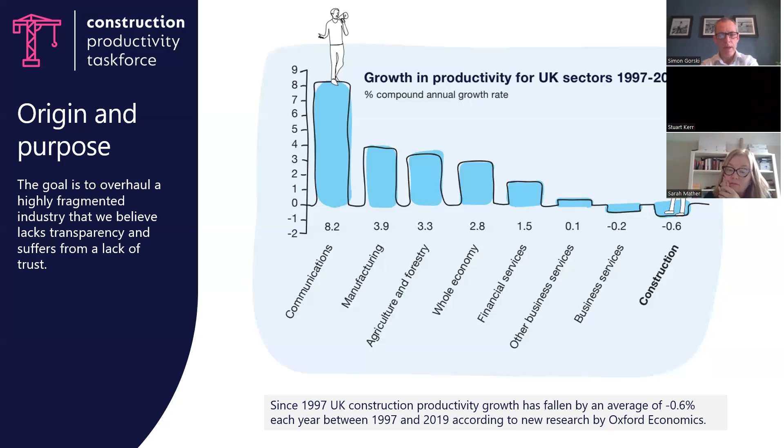Of course, there's definitely that to our industry, but I know that most of the people that have dialed into this call and most of the members of the organisation will be thinking about how we do it smarter, better, and that's a little bit about what I'm going to talk about today.

Be the Business as the organisation formed a few years ago, and Anthony Impey is the chief exec of that organisation now, and they really look to industry to pull together some of the industry's most significant organisations into looking at how we drive productivity improvement across the construction industry, the whole cycle of the construction industry.

I hope you can see the sort of full screen of names there, for those that are sort of dialing in who aren't part of the green room, if you like. But what hopefully you can see there are organisations like British Land, GPE, Great Portland Estates, and Landsec.

And it was really important that when we established this group that it was client-led, because you can imagine, for those of you that work in my world of the tier one contractors and the supply chain, if we came up with anything without the clients on board, it would be seen as self-serving. Well, of course, you would say that, wouldn't you?

So we've established what I think is a really powerful and representative collection of organisations there that are clients, tier one contractors, supply chain, and both design, project management, and cost consultants. And that sets us up for real success, I think, in what we try to do.

What we're not doing is we're not competing with the established groups, Build UK, the Construction Leadership Council, the British Council of Offices, and that's not our purpose here. We're not trying to form another breakaway group. I think many people on this call will recognise that we're quite a fractured, sometimes fractious, but quite a fractured industry that does unique things on a regular basis.

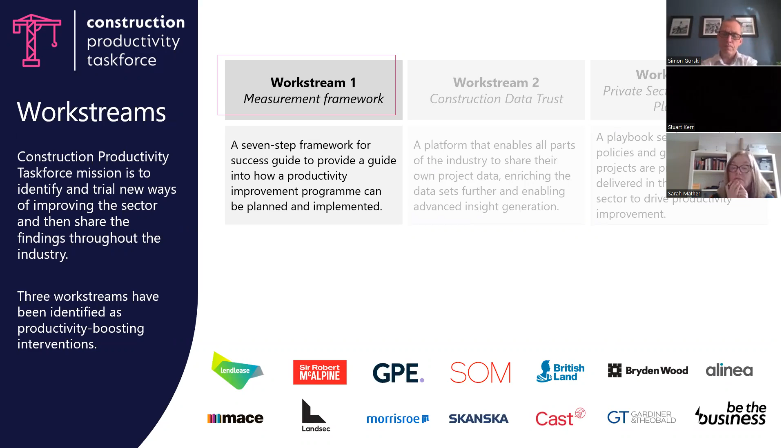The reason the clients are very interested in this is that they want to know that if you do get this data, both the measurement framework and the data trust information, that they will get better, they'll get it quicker, and they'll get it for less.

What the clients are very clear about here, and I can tell you I'm very clear about this with our supply chain and others, is that profit is not a dirty word, but we need a sustainable industry. I use that in every sense of the word sustainable, but we need a viable industry, an industry that's able to make fair profits, to be viable, to have positive cash flow, and we need a supply chain able to support us.

This moves me on to the private sector playbook and what I want to talk about today and why I think it's so important. I and other organisations had a small part to play in the public sector's, the government's construction playbook, which came out maybe 18 months ago now, and version 2's already been issued. To be fair to the government, I can't always say this, but it was a very collaborative process.

But of course, the government's construction playbook is necessarily different in some ways to the private sector playbook, to trust and productivity, because there's government policy you have to abide by. There are specific rules governing payment, competition, governance generally, and how that works, and the rules around procurement that don't necessarily apply in the private sector, but there are many things that do read across and play across to what the rest of the industry did.

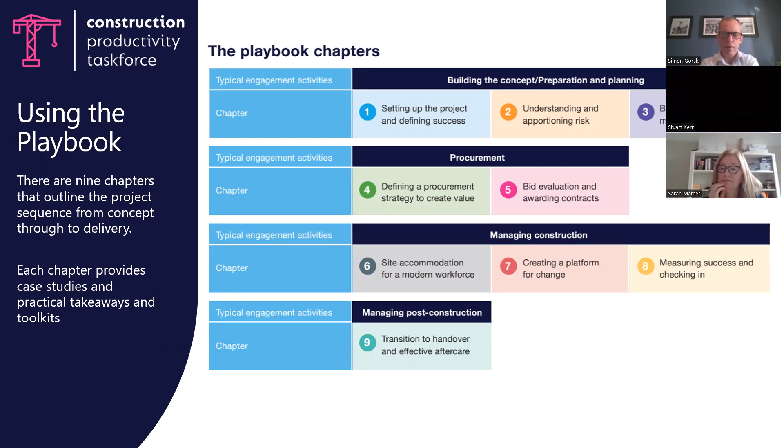It's about innovation, and it's about, when we finish the job, finishing well and handing over in some style, so the building is ready for occupation, and that there aren't going to be things going wrong, and we don't have a reputation. We don't want an industry to perpetuate a reputation of having to go back and fix yesterday's problems.

Mental well-being, ensuring that the people that we look after... I don't need to tell you all the stats about suicide within the construction industry, but let's just say it's horrific. I don't need to say that society now and the pressures on us all, the cost of living crisis, the pressure on people that work in our industry and many others is hugely challenging. That is non-negotiable. If we're creating conditions that make people's lives less safe, the public, our workforce, that their well-being is negatively impacted, then we're not doing a good enough job.

That's non-negotiable. Sustainability, of course, a commitment to taking carbon out of the environment, and our commitment in that space is also non-negotiable. We've all got organisationally our own challenges. Lendlease has got very ambitious targets. Delighted that we're already net zero in our construction business for scope 1 and scope 2.

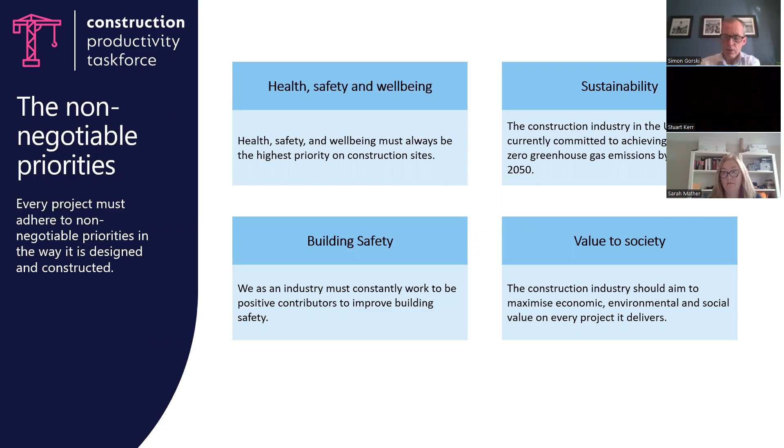Home straight, I promise, because I am gabbling now, but I love this subject so much. We do have these 10 drivers for success. When you do get the book, please do go through this and understand what we're talking about, this effective partnerships. Again, as contractors, for me, it is about understanding what the pipeline is, understanding what the future holds for clients, and then we can make investment decisions.

I've talked about, for example, the Ministry of Justice, the Ministry of Defence in the public sector, but the same with British Land, with GPE, with Landsec and others. Let us understand what your pipeline is, how you're going to move forward on it, and then we can invest and create long-term partnerships with you and with our supply chain.

I'll let them read, you can read the rest yourselves, but you can imagine there was interesting and robust debate about things like allocating risk fairly and getting paid fairly. I'm delighted to say the clients were very supportive of this. We launched it in November, as I said. It was fantastic, we had 150 or 160 people there. It landed really well. The next phase of our launch is to do things like this.

I can see Dirk's now coming to my screen because he's got some questions he wants to facilitate. So if you want more, there's a couple of links in the presentation, you can get to those. And Dirk, of course, I will send you any links to the information you want. I commend it to the audience, as they say in all the best budget speeches. Dirk, I'll hand back to you to maybe facilitate the questions.

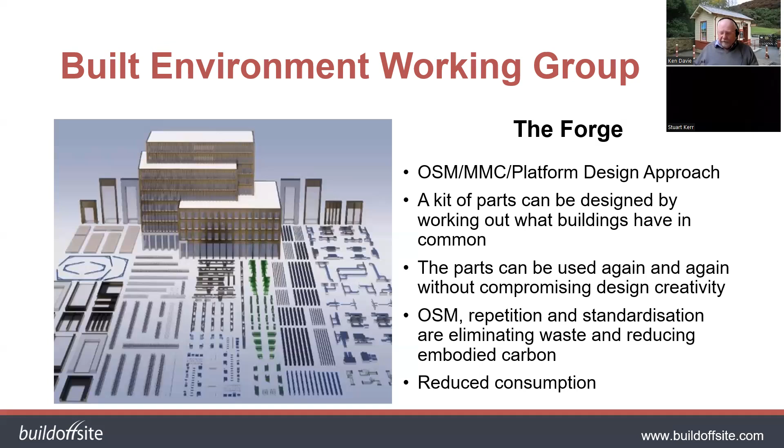Just very, very briefly, not wishing to steal Andrew's thunder on Millsite, really fascinating project. I think one of the key things here is the fact that 4 tier 1s have actually pooled their staff and experience to actually get this project on site in less than 16 months. Kier, I understand, is running a project in terms of tagging and tracking precast components, looking to improve productivity, quality, and potentially to improve valuations to reduce the amount of effort required.

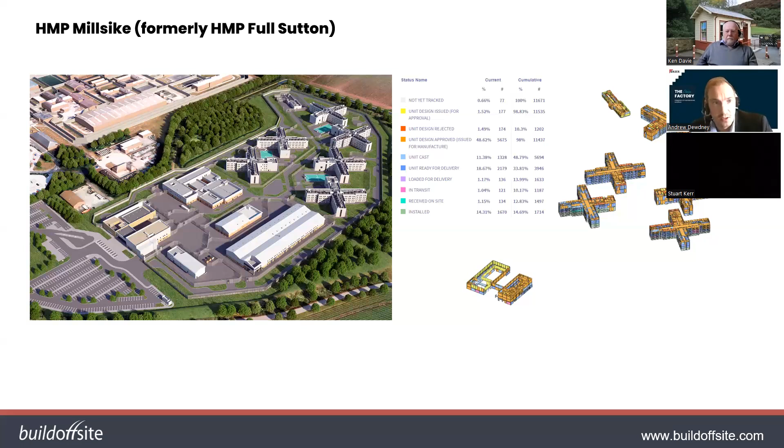I'm going to go back a slide to this one. So in the last year, we've been working really hard to further integrate our supply chain. One of the real successes we've had is getting onto the Crown Commercial Service Offsite framework. This is a new framework that's taken over from an old modular buildings framework. It has a £10 billion throughput for spend in the next 4 years, split between key sectors, which are all our key departments where we work for the government. We do about 80% of our work for the government, so those are the key sectors we work in.

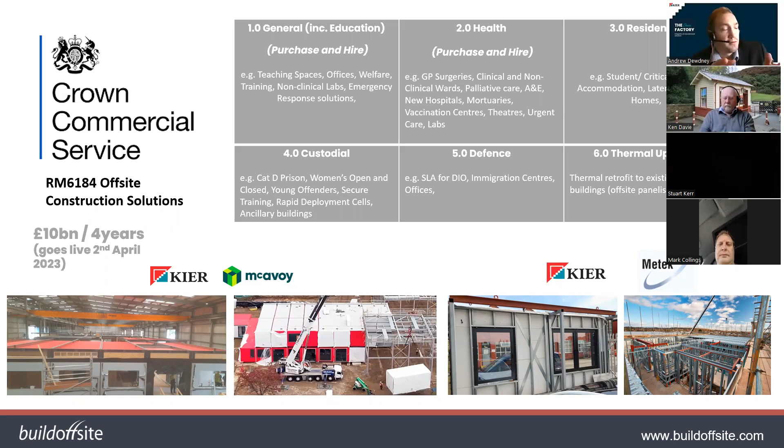Interesting to see the thermal retrofit, which is for an offsite panelised retrofit, so you can see where the government's thinking about that. As part of integrating for this framework, we've set up 2 JVs. Kier have set up a JV with McAvoy, Kier McAvoy, for our 3D lots, so each of those key sectors is a 3D lot. And the bottom right, our 2D panelised JV, Kier Metek, so each of those government departments or sector departments also has a 2D lot. So we're really happy with our further integration and how we're getting really close with some of our supply chain.

And then the last slide I have is just a bit of an update on our private sector. We've won a couple of really interesting jobs in London with commercial private sector clients, both heavily offsite based. The market for offices is still quite buoyant, surprisingly, after COVID.

Absolutely, the cut and carve retrofit is up there as well, which is where we're looking to in the future. But certainly, we're really proud of some of the commercial offices we're currently delivering on site at the minute.

And that is pretty much the update of our key offsite areas throughout the last 12 months. We've got offsite projects across the board, across all the sectors. But I wanted to keep it quite short and sharp and give you an update.

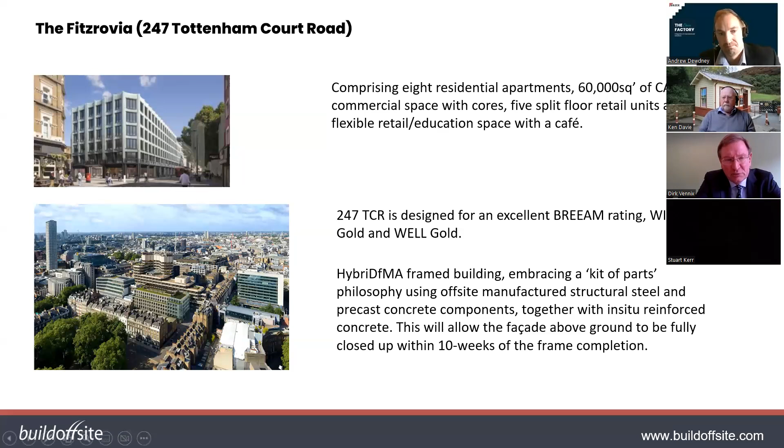Thanks very much, Andrew. That's a really good overview. I'm surprised you didn't mention winning the Infrastructure Award of the Year last year, but a really good job showing what members are doing in terms of trailblazing on the offsite front. So thank you for that.

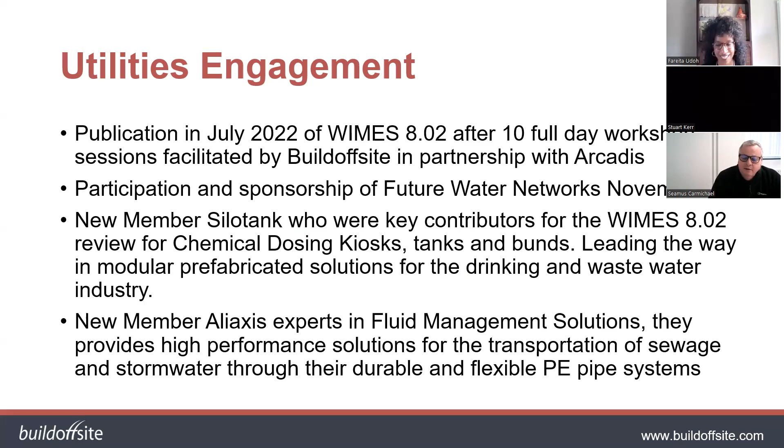Good morning, Fareita. Good morning, fellow members. Thank you for having me today. I'm Seamus Carmichael, Managing Director of Silotank, and we're based in Belfast, Northern Ireland. For those of you who don't know our company, we've been around for about 31 years, leading manufacturer in chemical, liquid and drinking water storage tanks. We also make process vessels, salt saturators, pressure vessels, scrubbing systems and odor abatement systems out of a range of thermoplastics and fiberglass materials.

As Fareita said, we were involved with Roger Marlowe on the rewriting of the WIMES standard and made our contributions there to the rewrite and republication of that standard, which came out this year, hopefully for the better. However, today I want to talk to you about conical settlement tanks.

For the last 10-15 years, we've been building these in fiberglass, and through our experience working with various contractors, we realized that the on-site part of the construction of these sectional units was causing considerable time and safety issues. What I mean by that is that where we have a 6-meter diameter unit going to a wastewater treatment works, this would have been supplied in sections which would have had to be bolted together and laminated and passed down into the hole, and then the pipework and weirs would have had to be built inside it.

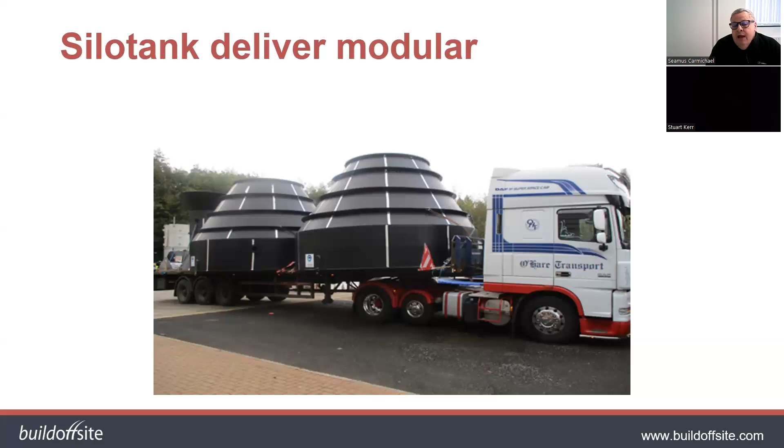So the ability of what we've produced now is that our HDP conical unit, with a wastewater treatment works, the hydraulics of the site are very important. So shell heights may vary, and through our approach and our manufacturing, we can customize the diameter of the unit to the specific site, which does 2 things. Number one, it reduces the amount of material, and the amount of carbon, but it also allows for a more targeted treatment process, which benefits the end client.

The beauty of using the high-density polyethylene material over the traditional fiberglass is that it has better chemical resistance properties. And as we all know now, in the current marketplace, people use a lot of chemicals in their houses for cleaning, which find their way straight into the wastewater treatment plant. The internal finish of the conical settlement tank in HDP is like a glass smooth finish, which aids the cleaning of the unit and the operation of the unit, which we found received feedback from various operators that's a benefit.

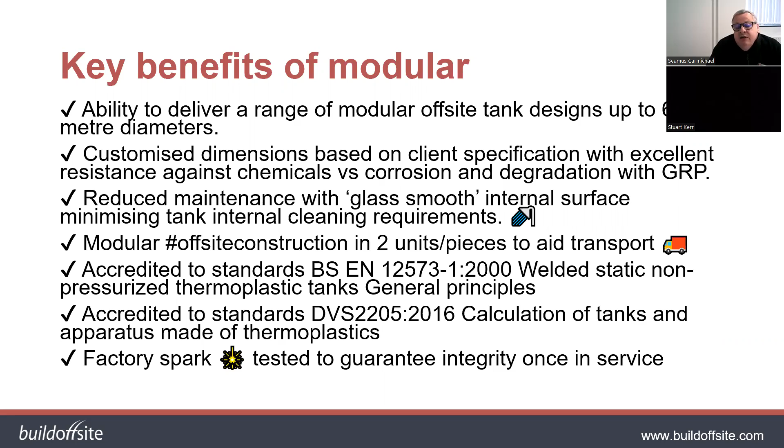So all our units have all the pipework, the weirs, the diffuser drums all built into the unit before it leaves, and they're transported to site upside down and then topped and tailed. And if they're over 5 meters, the bottom cone section is joined at site, and then it's dropped down into the hole, filled with water and backfilled with concrete.

So the traditional way, and what we had done up until 4 years ago, was to make these in fiberglass, and it brought a lot of health and safety issues. Our original ethos and objective behind developing a factory constructed unit was that we wanted to reduce the on-site installation time, but we also wanted to reduce the fact that operators would not have to climb down into these units. Some of them are 7 meters below the ground in order to fit pipework and fit weirs.

So the HDP has cured that, because they're all welded in at the factory and leave the factory constructed. The other problem we were having as well is that weather was dictating how quickly we could install a GRP unit, because after the sections were bolted together, the joints inside had to be laminated, and you couldn't do that in cold or wet weather.

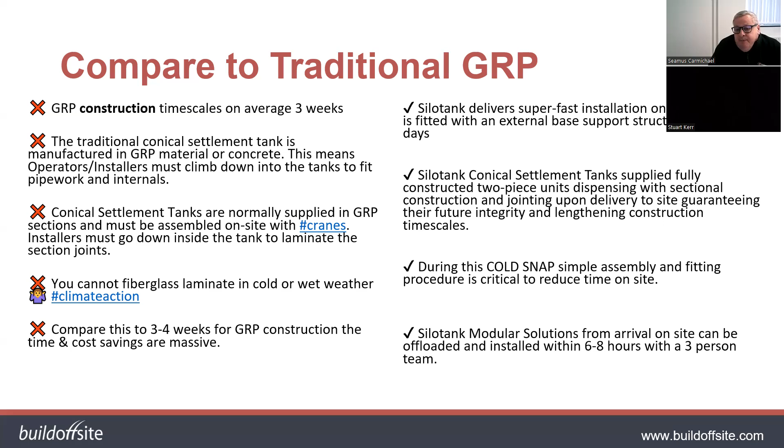I have some shots here for you just to show you the install. You can see actually the depth at which the excavation goes down, and the amount of reinforcing of the surrounding soil that's required. So on the larger units, which have got 2-piece, we send the smaller cone section forward to the site.

Which allows the client to install this and backfill it. So when the larger 6 meter or 5 meter or 5.5 meter diameter section arrives on site, it can be topped and tailed very quickly and joined to the already installed section.

On units that we sent to United Utilities for bulkly, VolkerStevin, from receipt of a 6 meter unit, after having got the small cone section the week before, they had the unit installed in 2 days. And we're very pleased with the time savings that they'd achieved.

You can see the amount of reinforcement that goes around the unit, which is usually required due to the fact of high water tables in a lot of areas, and then a couple of shots of the finished concrete surround and the bridge that goes over the unit.

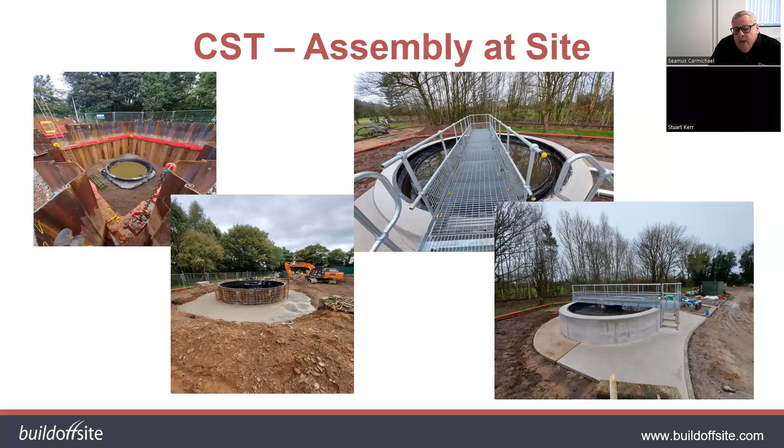As Simon had described earlier, carbon is going to become probably one of the major purchasing decisions going forward for products, and we've seen this coming more and more to the forefront for the last year, and have appointed an internal carbon manager, where we're looking at all our products from the point at which the product, the granule, is actually made for the HDPE, right through to the delivery to site.

And what our analysis, with the help of Invest Northern Ireland and a carbon specialist, we've now developed a carbon calculator model. And the interesting thing that has come out of this is that when you compare a HDPE unit to a fiberglass conical settlement unit at a 4 meter diameter, there's a 28% saving in carbon, which is massive.

The good thing about HDPE is that at the end of its life, it can be taken out, cut up, and turned into regrind. You usually see this product present itself on park benches and various products like that, decking.

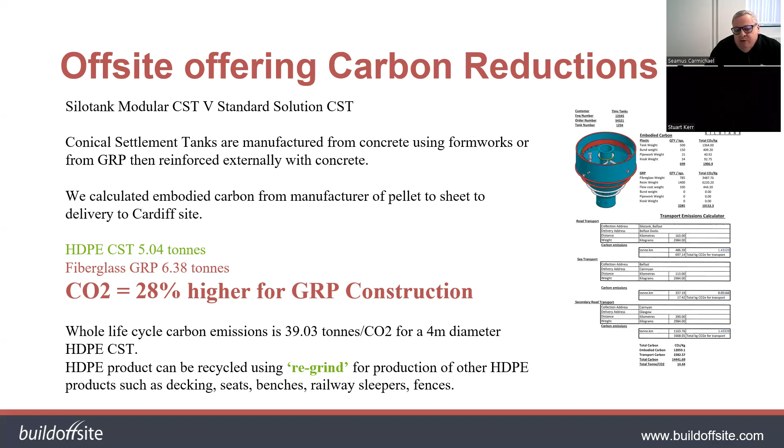Carbon is going to be the driving force going forward, and we can see that becoming stronger every year, being asked for by more water utilities. What is the embodied carbon in your product is the main question we are being asked month in, month out now.

So we're glad to be able to present that now. We joined the Buildoffsite initiative. Farida is very convincing and highlighted the merits of it, which we found to be very true, and we've only been a member now about 6 months. Farida's been helping us with spreading the word of our offsite construction, factory constructed HDPE conical settlement tanks through various water utilities. That's a slow process, but we're unstinting in our approach.

Welsh Water have been very engaging with us, and we've been feeding lots of information into them and waiting for further feedback to come back from them. Farida's been developing a range of case studies for the various sites and projects that we've been doing over the last 3 to 4 years, just to show the marketplace the added benefits that contractors are receiving from using the HDPE conical settlement tank.

Any questions? We have some questions through the chat. There's a question from Ganga Prakya at Sir Robert McAlpine: what is the design life of the HDPE CST? 50 years.

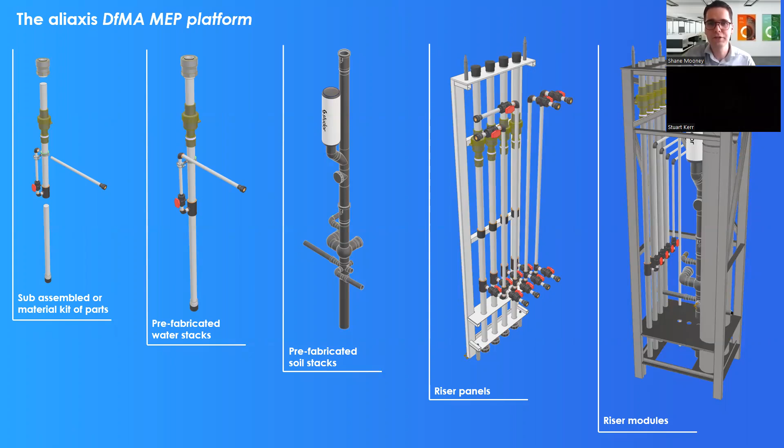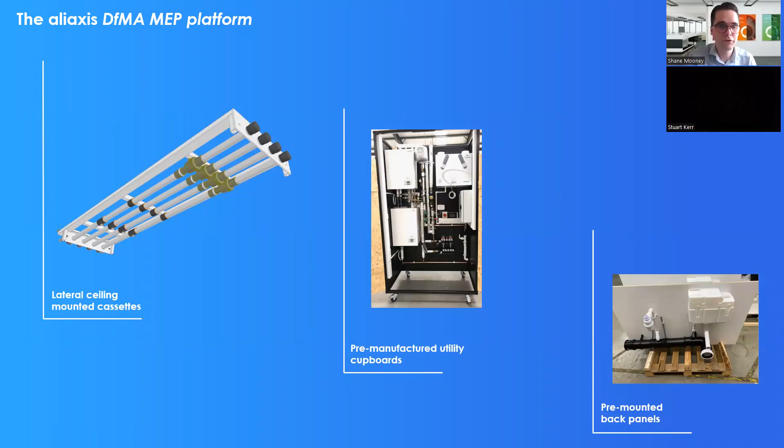This is more than just about riser modules. It's about lateral ceiling mounted cassettes, manufactured utility cupboards, and other second fix apartment type solutions that we bring in through both internal innovation and through works with our partners.

Again, some of this may be very obvious to people that have worked in the industry a long time, but I'll go through it because there is a point where it becomes a little bit different.

Naturally, delivering this sort of solution relies on collaborative design at a really early stage of a construction project, and we see the most ideal stage being between stage 2 and 3.

Services are pre-installed by the experts we have in-house in a dedicated production environment, and all of the benefits that sort of controlled environment brings.

Each service is fully tested before it leaves our factory to robust quality procedures - that could be the ventilation pipe, the soil and waste, and pressurized connections too.

The complete modules are delivered to site in line with the demands of the project schedule. That's really no different to how other providers are delivering these today.

However, we are focused on the installation, as I mentioned earlier, and the proposition is that we will lift these modules up, lower them, they will click into place, and they will connect without the need for any manual intervention at all when it comes to the individual service connections.

The innovation you can see here, hopefully you can see it well, is a precision cut plate at the top of each module with an integrated pin and bush system, which aligns frame to frame rather than plate to plate to ensure precision alignment.

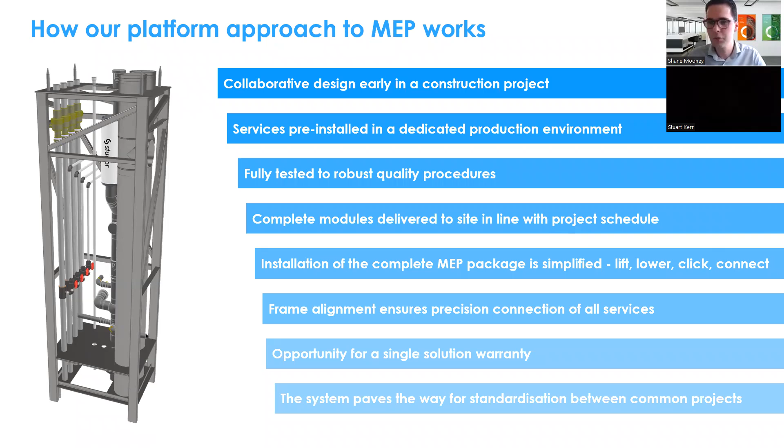And the system will naturally pave the way for standardization between common projects, hence the platform approach.

How much time have I got left? I'm going to race through a bit of this so I don't overstep the mark too much.

We've spoken a bit about this already, but speed of install, installing these things efficiently, has really been a focus for us. What we expect to do is set the foundation plate before any risers are delivered to site, and then when they're delivered, they simply land on top of each other with no secondary fixings needed.

There are obvious health and safety advantages, like people not working over each other on site in quite a restricted space. But we have also built in a fall protection grid, so no GRP needs to be retrofitted when pipes are installed, and there is no need to make those manual connections, which obviously creates risk on site.

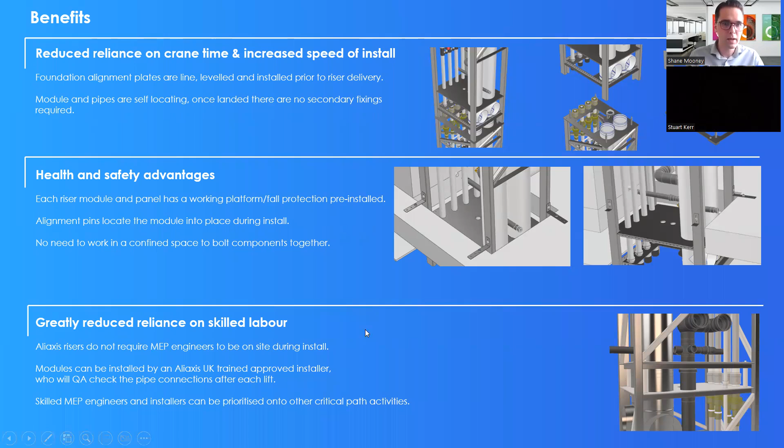Doing it in the way that we're proposing, we believe greatly reduces the reliance on skilled labour, and we believe that the labour that would usually be deployed for that can be redeployed elsewhere onto other critical path activities.

Delivering in this way naturally will pave the way for better facility management. So we think that the whole principle of what we're doing is to make sure that what is designed early on in a project is delivered on site in reality.

This is going to be helpful to guide people to exactly what they need to find. The module that we've designed that you saw on our screen, the big riser module, can stack 16 stories without the need for resetting.

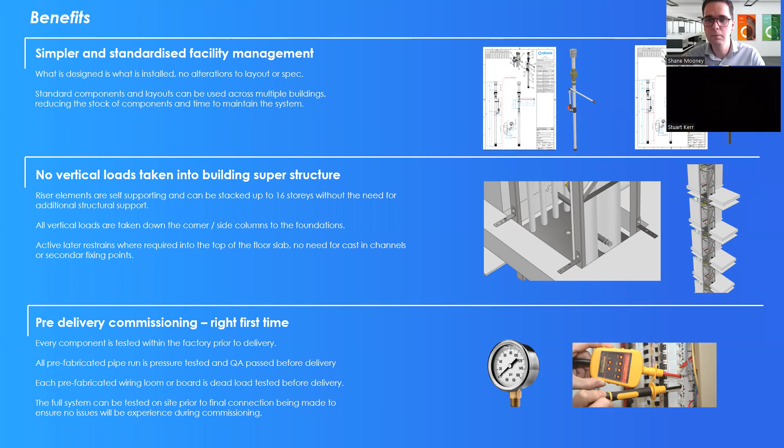There is a lateral support required at every 8 stories. As mentioned earlier, all components will be tested before delivery to site, and we anticipate that we will need to cap off the complete riser before pressure testing the entire building before it goes through to full commissioning.

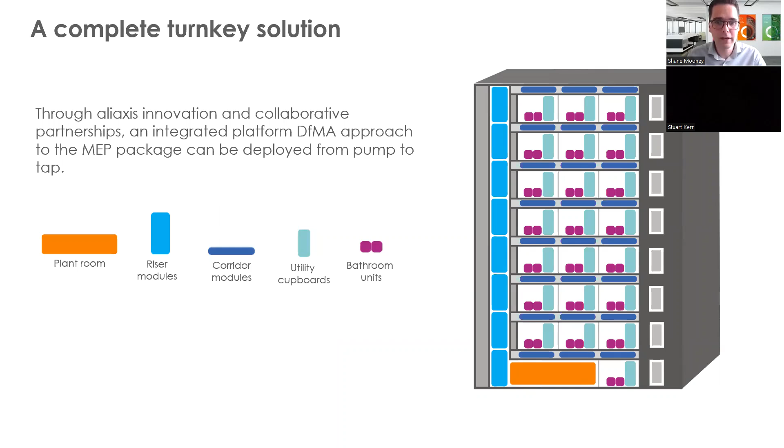Again, just a quick reminder, this is not just about risers. We envision this being a full turnkey solution through both our own innovation and our partners. I'm being told to wrap up, so I'll do so very quickly.

The way that we deliver quality helps to deliver means 3 key things for the future of building: operational performance, things being built better and as they're expected to be, simplified facility management for the reasons mentioned earlier, and the paving of the way for a complete solution warranty.

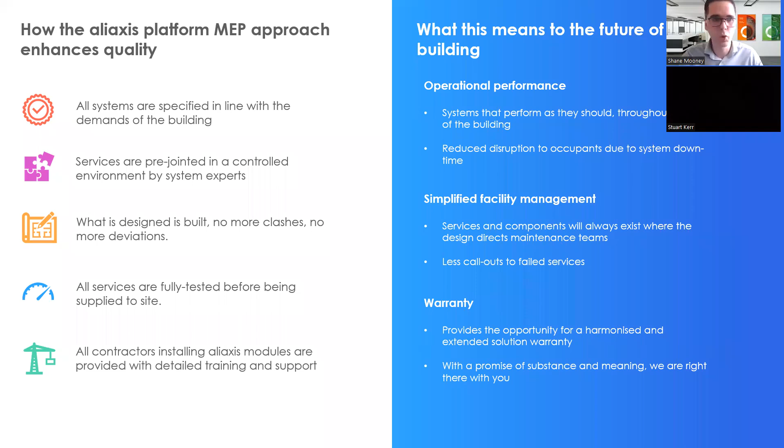Ganga's asking about the lateral connections of the horizontal modules. Is that still the same principle of plate and pin? Is the same principle required for the lateral connections?

I don't know if you can see the chat, let me check the question. So the question is, was it about tolerance of lateral connections connecting into the riser module? I can't, bear with me, I'm ever so sorry. What about lateral connections of horizontal modules? Is it still on the same principle of plate and pin?

Yes, that's correct. Sorry, the picture wasn't particularly good on the slides that we shared, but yes, we envisage it working on that same principle. It will also use the same connection innovation we've developed for the riser, because it caters for that inherent lack of precision when it comes to how buildings are built today.

Could you also answer Nigel's question about the strength of the pipes? So I'm just trying to find it. Nigel asks, does the strength of the pipes connections within the modules get taken into account when calculating the strength of the carrier frame to reduce material content?

So a little bit about National Grid. It's interesting because National Grid is a name that everybody knows, but the bit of National Grid that I'm from is a recent acquisition for National Grid Group. So I think when people talk about the grid, they talk about the transmission bit - the bit with the orange boxes on the left-hand side, that's the high voltage backbone network across the whole of the UK that looks after electricity transmission, connects power stations to everybody. The bit that I'm from is the green bit.

So in our world, we're a company that were called Western Power Distribution before we were called National Grid. And actually, if you're as old as me and you can remember nationalisation, we were South Western, South Wales, Midlands and East Midlands electricity boards. But we basically serve 8 million customers across that chunk of the UK. It's about a third of the customers in the UK. And it's likely that if you've got an electricity supply, it will come from us. There are independent operators working in patches, but generally, if you've got a supply, it's ours.

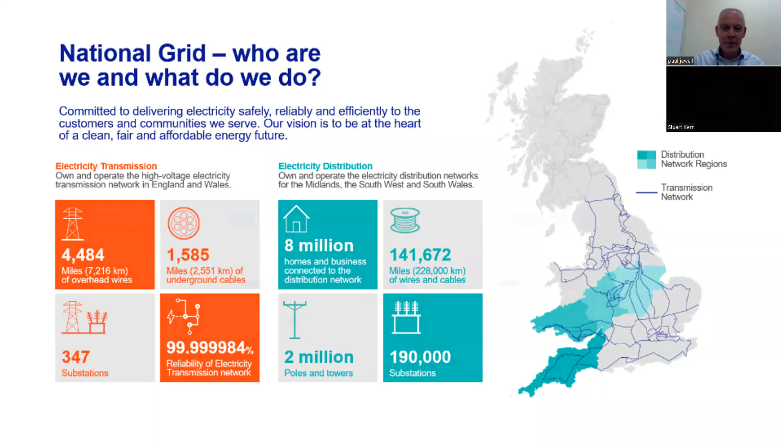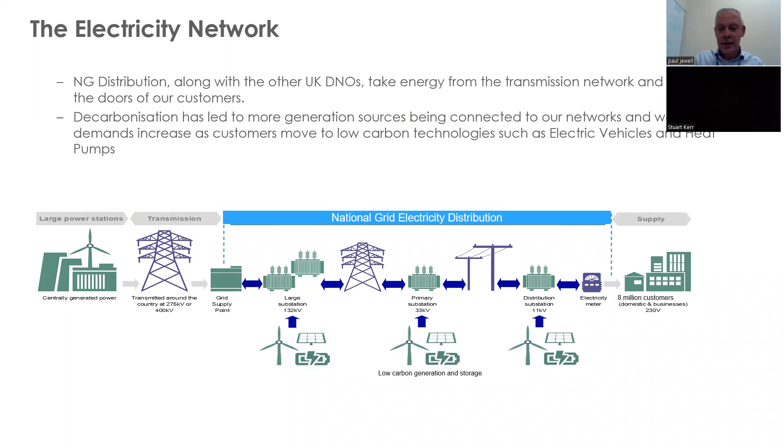And with the changes of decarbonisation and net zero, what we're finding is there's a different mix of customers on our network - a lot more customers that will generate electricity straight into our network, which isn't the old traditional role where all of energy was generated at large power stations over on the left of that slide and pushed across the right hand side. So we're changing the way that we do things, all in the line of trying to get the government and the country to net zero. And I've mentioned net zero a couple of times.

Where that net zero shorthand comes from is a government announcement, I think when Theresa May was Prime Minister, to get to net zero carbon emissions by 2050. It's a big ask, a good target. The original target was, I think, an 80% reduction. That's been in our world since the early 2010s, and the carbon plan document, a government document, still exists - you can still download it if you're that way inclined.

What it basically says is that the UK is going to reduce its carbon emissions by taking energy we previously used for heating and transport and turning it to electricity. So we're already expecting more energy to be supplied by our network. I was interested in the question about asset life to the speaker a couple of speakers ago - the electricity grid essentially has a 50-year asset life as well. So if in 2023 we're not already building assets ready for a fully decarbonised future, then we're missing our opportunity.

So thinking about where things are going, let me share some government numbers. Fast forward to 2030, you will not be able to buy a petrol or diesel car - you'll buy a hybrid or electric car. We know there's 1 million registrations in the UK a year. We also know that by 2030 government expects 600,000 heat pumps a year. Take that 1.5 million-ish things, put it into our network with a third of UK customers, and we get to a world where we're connecting 500,000 things a year, either to existing connections or new connections - that's 2,000 every working day.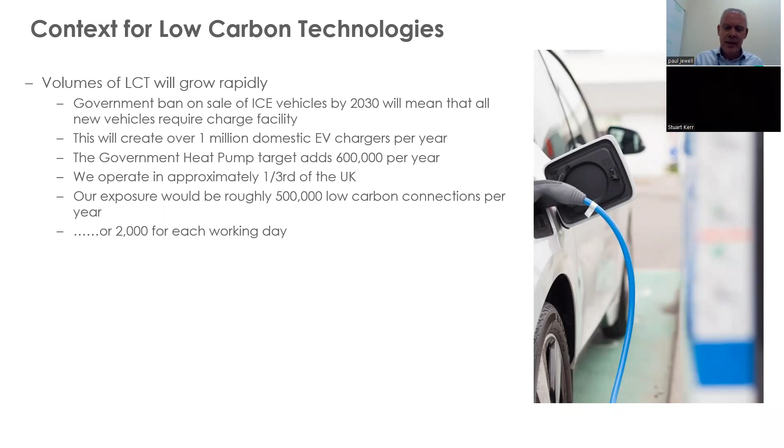In our world, when we looked at electric vehicle charging, we looked at domestic charging first. In fairness, a lot of early adopters of electric vehicles tend to be people who can afford relatively new cars, so tend to be people with driveways and garages. So a lot of that early heavy lifting was done by the existing network. But we then started looking at what happens on the motorway network - where do we go with motorways?

I was looking at what we should do and how we should change what we do, at the same time as the government set up Project Rapid - a fund, I think about £950 million, to put charging capacity on motorways and trunk roads. The first thing they did was work out how many megawatts of capacity is required at each motorway service station. It tied in with the sort of numbers I was coming up with, and in very simple terms, it means a motorway service station will have the demand of a small town to feed all those chargers.

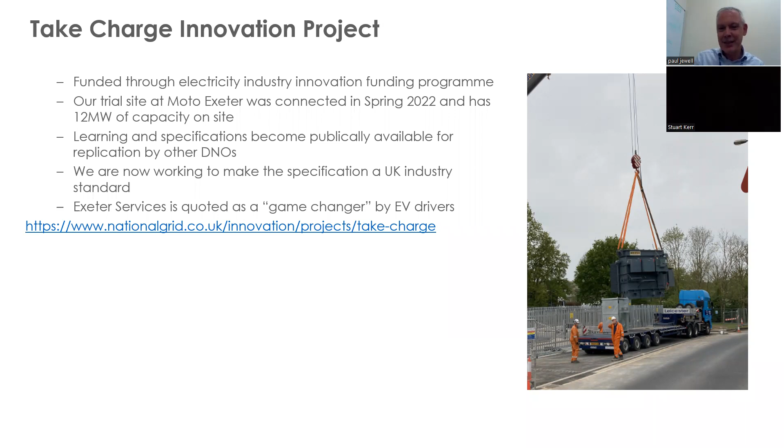Now, that's what it looks like, and you can see that it comes in two boxes. The box closer to you is the transformer. It's a total change in the way we build transformers, in that most of the ancillaries are already bolted to it, so it can come in one lift.

The box behind is the box that has all the switchgear in it, and that, again, is another single lift. I was there the day this was delivered, and it's fair to say it took longer to build the crane than it did to hoist those two bits of kit onto their plinths. That's sort of what I was looking for, something that gets most of its build done offsite and comes together in one piece.

So just to bring some themes back to the world that you guys are in, we've always built substations bit by bit. It's unusual for us to turn up with two boxes and just dump them on site, but it's perfect as a solution we've always used at 11,000 volts for the supplies that go to housing estates and the like. So what we needed to do was make it bigger, make it fit.

So two boxes. You saw the transformer on the last slide, and that's the picture of the switchgear box. Another thing we did is that those two boxes have a lot of small wiring between them. We created the umbilicals between the two as specific plug and socket arrangements, such that a lot of the pre-commissioning testing of all the kit that runs between the two of them could be done at the factory and just plugged in the same orientation when they turned up on site.

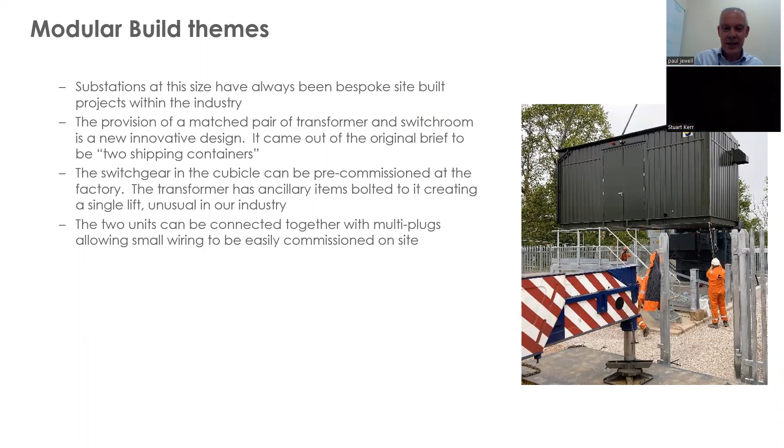And that is essentially a quick run through what we've got for the future.

So there's some questions, Dirk. Do you want me to? Yeah, by all means. The obvious one is around expanding to other parts.

I think when you're looking for locations like that, the one we built was 12 megawatts, 12,000 kilowatts of capacity. We think our standard is going to be 20 megawatts, 20,000 kilowatts. That's a bit steep for urban fueling stations or supermarkets. I don't think they will need that level of capacity. But where I do see it being reused is for big transport and haulage operators, and at airports and seaports, where you need a big lump of electricity in one space. The answer for urban fuel stations and supermarkets is the 1 megawatt lump that I talked about that we would normally use for a housing estate.

We've reworked that to provide that as a lump that can go into a car park. So 1,000 kilowatts of EV charge capacity can go in a supermarket, it can go at an urban fueling station, whatever.

Amazing. Paul, sorry, I had another question as a follow-on from that question. These don't look really pretty, and I know this is utilities, I know this is infrastructure, but what is the capacity to actually bury these in the ground and have a nice garden on top? Is that possible?

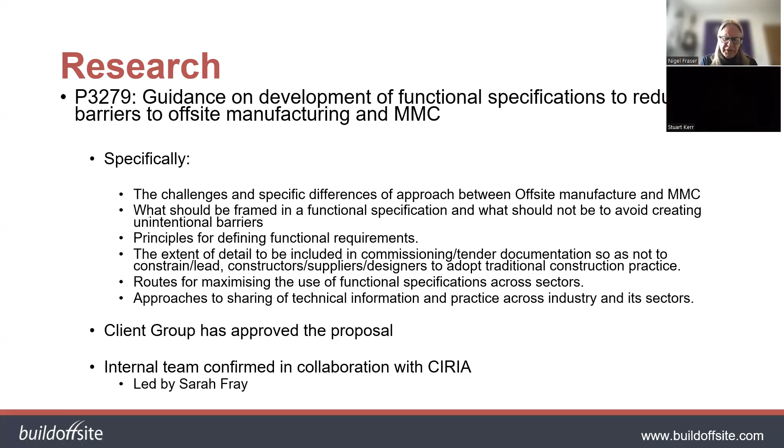And the key thing, though, is that we really need to fund these projects, and some of you on this meeting may well be interested in becoming associated with them. If you are, please contact Dirk.

From my perspective, these are great opportunities to actually influence industry going forward and help the sector move in the way that government and others would like to see it develop further. We're not a nascent industry anymore, but there's still a heck of a lot more that we can be doing than is being done. Both of these projects are aimed at enabling that transformation of the industry and increase in productivity to be accelerated. So if you'd like to be associated with that, please contact Dirk and look at how you could be engaged with the project steering group.

Just a bit more on transport. In recent months, we've done three visits to the very large and very impressive precast facilities that the Align JV have set up for HS2 tunnels and viaducts.

We've also just had another meeting with Transport for London hosting us at Victoria House, in conjunction with Network Rail's involvement and a group of authors from the Linear Infrastructure Overbuild Guide, to look at what is happening in this sector, what are their targets as rail infrastructure owners, and what are the current projects in London. They shared information with those of us who attended, and it provided an opportunity for a detailed Q&A session with people who had actually done projects like this, plus great networking, both in the middle of the meeting and at the end. So watch this space, because these events are really quite insightful and interesting.

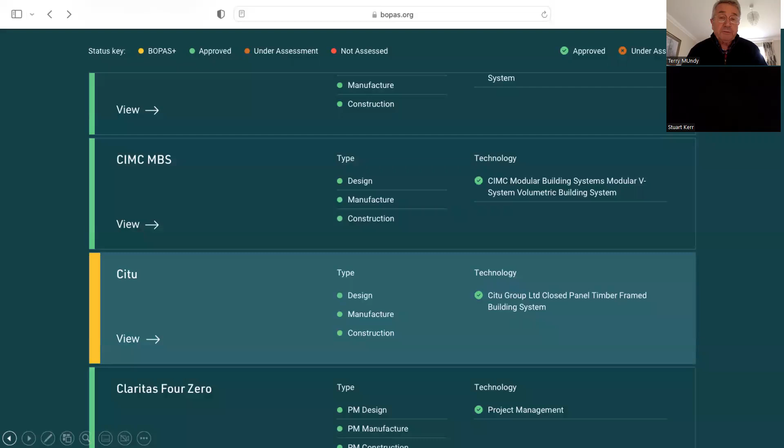I have another question: are top-down standards effective? I make reference to BRE BPS 7014, which had a scope of work almost as extensive as the PAS 8700. I was on the review panel for that in December 2018 with a view to it being published in 2019, and it still, to the best of my knowledge, hasn't seen the light of day.

This is the BRE MMC standard. What message does a plethora of standards for MMC indicate to stakeholders such as lenders, and does it feed or dispel the risk narrative? This is in relation to traditional build, which really isn't exposed to the scrutiny of MMC.

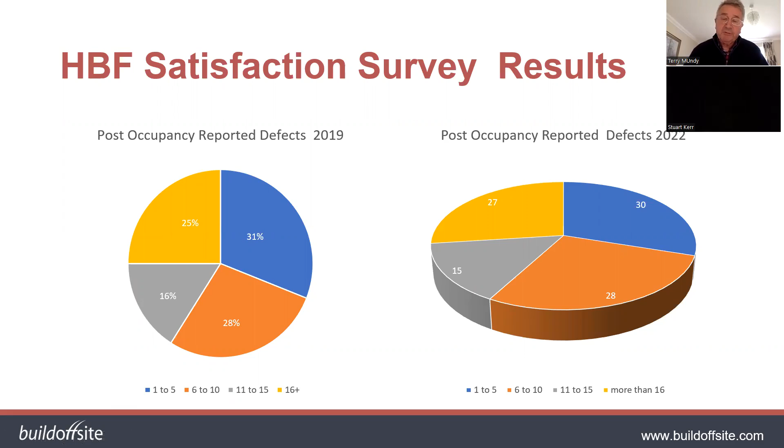So yeah, I think all in all we've got quite a lot to do yet in terms of setting expectations, and hopefully we can do that through much greater market penetration in the immediate future. And hopefully BOPAS will play a major part in that regard. And that's the end of my presentation.

Thank you. Thanks very much, Terry. Very thought-provoking stuff, and it's good to hear those sentiments being articulated in such a really powerful fashion.

So I would like to just finish off the proceedings around the member meeting with some quick updates from members. As you've just seen, we have got a lot going on through the BOPAS scheme, but also with the Offsite Show coming up. And I would like to invite Jamie to be our next speaker.

Hi, thank you very much for the introduction, Dirk. Most of you won't have known who I am. I'm relatively new to Media 10, who are the event organizer of the Offsite Show, which is part of UK Construction Week. But for those who have spoken to me in the past, hello again.

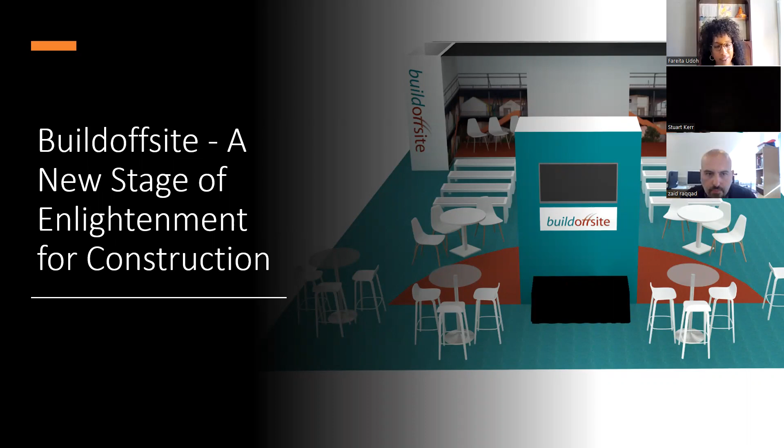Thank you, Charlotte. So the strapline for this year's show is 'Build Offsite, a new stage of enlightenment for construction.' You can see I've given you an impression of what our stand set arena is going to look like. We have a main stage at the back with some benches, and then we have an innovation hub as well. So we're going to be all in one area, and the full programme is what we are going to be rolling out.

Just on the main stage, I'll cover that off since we're a bit short on time today - we've got 3 days to cover. We have 2 headline sessions every day on the main stage, and networking after those sessions. We also have 6 sessions on the Innovation Hub. As you heard earlier, National Grid is going to be taking one of those sessions on day 2.

We start off with making a concrete change for carbon precast - is there one standard to be created? These slides will be shared afterwards, but we have a full lineup of speakers coming through: from the Infrastructure Projects Authority, from BASE, from Arup, from Homes England, from Mott MacDonald, and from C-Probe as well. So we've got a whole range of speakers lined up across those 3 days, which is fantastic.

On the Innovation Hub, we do still have some spaces, so if you're interested please get in touch. I have hands up already from Silotank and Roger Bullivant. I think Nigel Rake is on this session as well, so it'd be really good to tie that down. And obviously Seamus, who you heard from earlier.

This is what we've put together for our members, which is a sponsorship package. Because we have our own arena this year, we're really asking our members to collaborate and engage with us, but also to stand alongside us as a community for the 3 days at the show. We've got gold, silver and bronze packages, and you can contact me if you're interested.